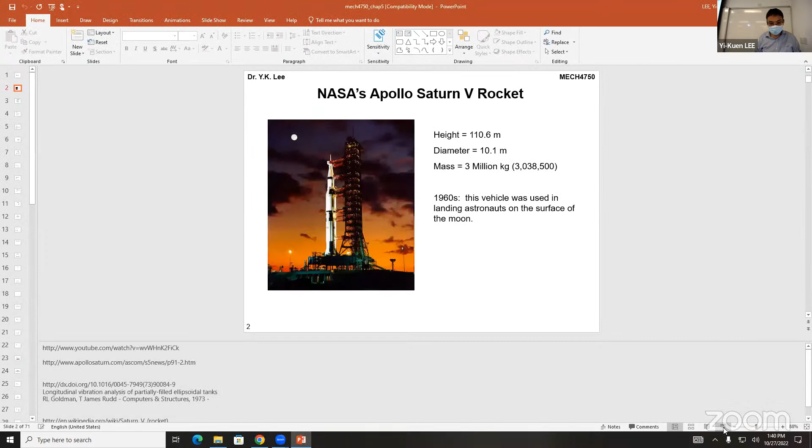Again, we have talked about this kind of two-degree freedom problem, right? The key question is I do hope that you understand, for different engineering, we may require different kind of model. I already showed you some example on this aerospace engineering.

Rocket problem, and then we showed you how we can use this kind of equation of motion, so that with two masses we can describe this with M and K. M is a 2 by 2 mass matrix, K is a 2 by 2 stiffness matrix, and we give you initial conditions, and then we can solve this differential equation either by hand if it's not too difficult.

If too big, what happens? We solve by computer, MATLAB, so something becomes a piece of cake. That's how, under harmonic vibration, we can reduce this differential equation into a linear algebraic equation. That is key. And then this linear algebraic equation becomes what? An eigenvalue problem, which you learned in linear algebra in our undergraduate math course.

The key thing here is, in this problem, what is known? U is a vector, the vibration amplitude vector, and these are unknown. What else is known? This is known. So given this mechanical system, our mass and spring or stiffness matrix, how can we determine this unknown?

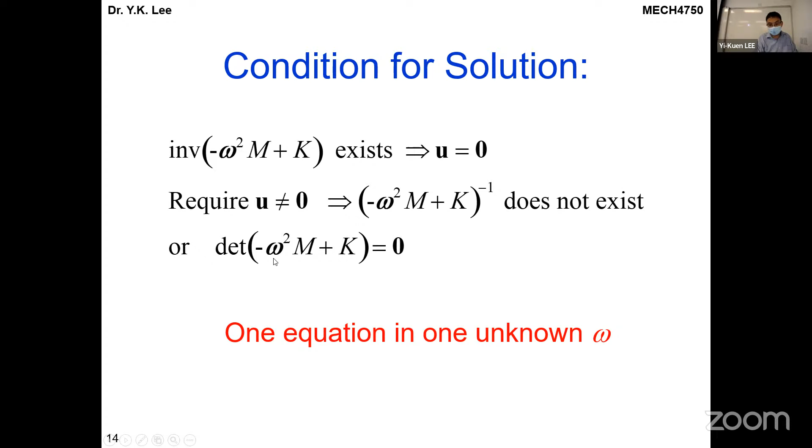So we basically try to solve this as an eigenvalue problem, and eventually for a 2 by 2 system, we can easily get the determinant of this matrix and solve for the unknown omega. This becomes a second order quadratic equation, and the unknown is omega squared, so eventually we can determine the natural frequency.

In general, there are 4 natural frequencies: plus, minus, and so on. So we get this result. And of course this is, basically, if it's a 2-degree-of-freedom system, with M1 and M2, then we have 2 natural frequencies. This is an important thing.

All of you should have no problem understanding this thing. But one student asked a good question: why do we have 2 solutions, totaling 4 solutions? So we have this one, and then -1. Most likely you can never find any mechanical system, M-C-K or M-K, that has a negative frequency, which doesn't exist in our real world.

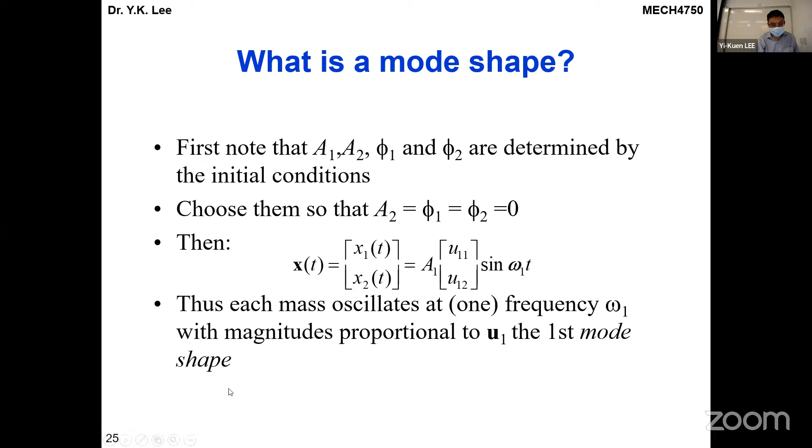We will then show you some examples about this problem. Of course, in MATLAB we can easily solve this problem, and then we will show you this in reality.

You can use MATLAB to do the simulation and also animation. That is something not challenging. I can provide you some MATLAB code. Do you know how you can use MATLAB to generate this animation?

Do you know how to use MATLAB to solve this kind of problem now? Do you have an idea? We already gave you some. Basically, MATLAB has certain kinds of functions.

You know MATLAB has an animate function. Once you can plot this kind of vibration amplitude as a function of time, animation, then you can use MATLAB to do this kind of animation.

Once you can plot this kind of thing, let me show you here.

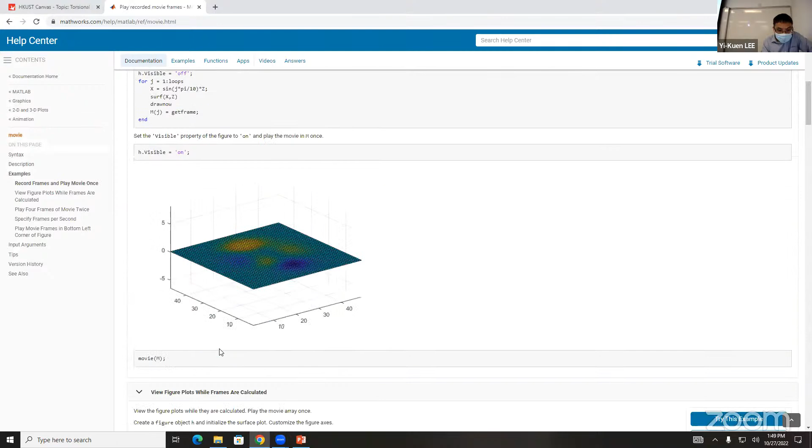MATLAB has this kind of function subroutine. So you use this one, and then you plot a series of these things, and you can generate the plot and do the animation. It's something not challenging with MATLAB. MATLAB has this kind of very good tools.

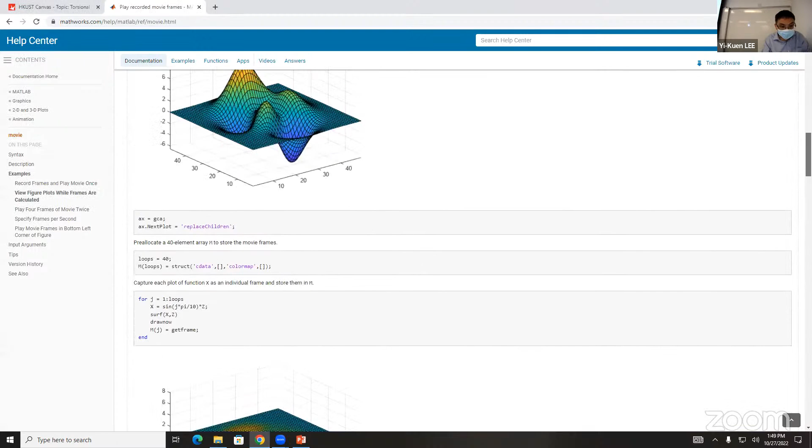Now let me quickly show you. Actually, this is one pretty good example.

Basically, movie. What's a movie? Basically, a series of pictures that play.

Maybe in 1 second, 30 frames, or 25 frames. That's what a movie is. Basically, you ask MATLAB to generate a series of pictures, images, and then play them. You see, movie(M), play the movie a number of times, and also specify the frame rate, FPS. MATLAB has this kind of function, and let me quickly show you.

It's a very piece of cake now. In old days, if you don't have a powerful computer, all this is difficult. But now your computer is so powerful, so it's a piece of cake. 20, 30, 40 years ago it was not easy, but now it's a piece of cake.

This is a membrane, a two-dimensional membrane structure.

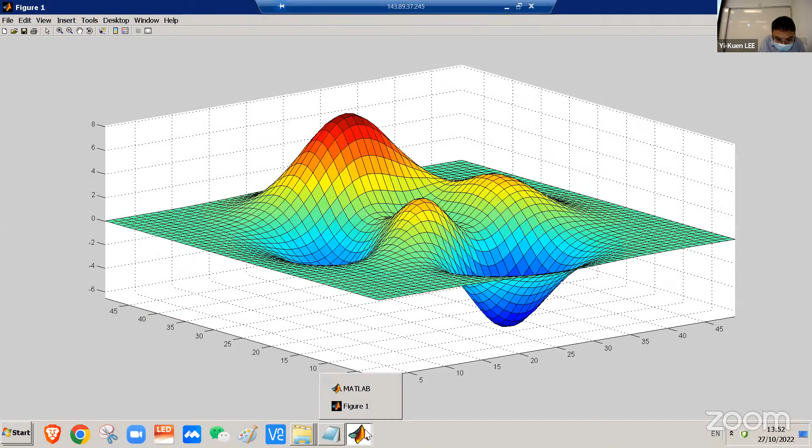I cannot copy, so I should use this kind of thing. I need to fix that, otherwise there's a little trouble to show.

The problem is I need to fix that X, Y, and Z, so there was none. Let me try this again, maybe shut it and then.

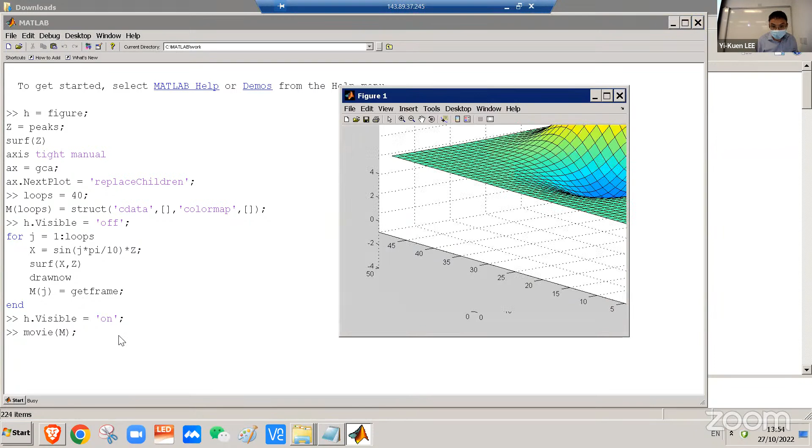Okay, can I make it a bit small? Anyway, let me try to play. Oh, it's shaking.

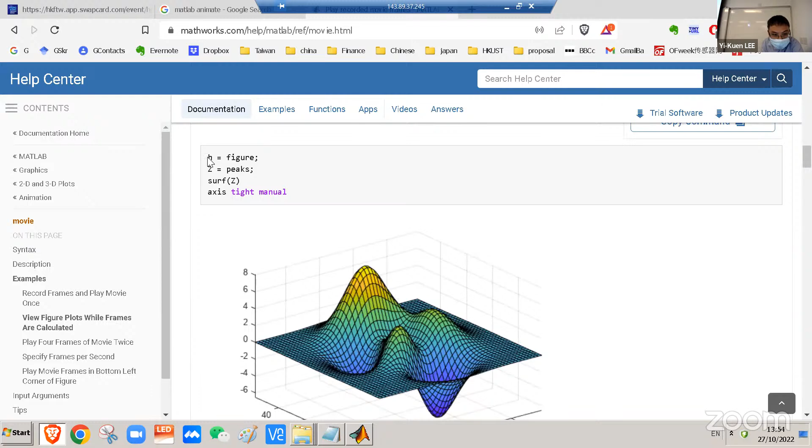I think this is the basic thing. I need to do some minor adjustment so it can show properly. We may need to do some adjustment to play this kind of video animation better.

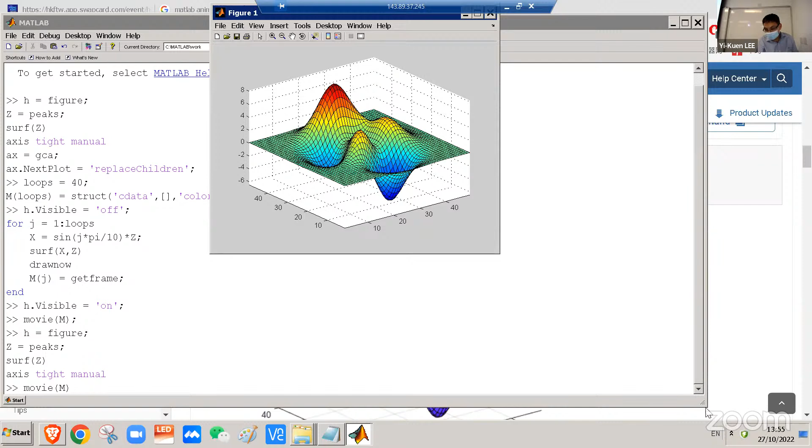Movie M again, hopefully it will be better. Sometimes you need to do some tuning about this parameter.

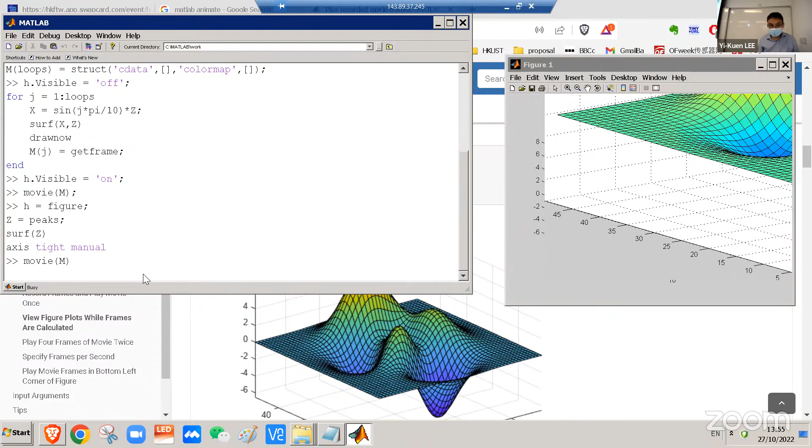There's certain things I need to do some adjustment for. I understand sometimes it happens. With the same thing you can try. I'm pretty sure there's a series of examples you can try to play.

For example, for a beam, at T1 you show this deformation, and at T2 you show another, so vibration X(T1), and then next you show the deformation X(T2). You basically use this to show at different times, and use this kind of movie function to show the vibration as a function of time.

This and then T3, right? This is a very basic way you can make this kind of animation and movie. Of course, MATLAB can also generate the MPEG output file, not only show it in MATLAB.

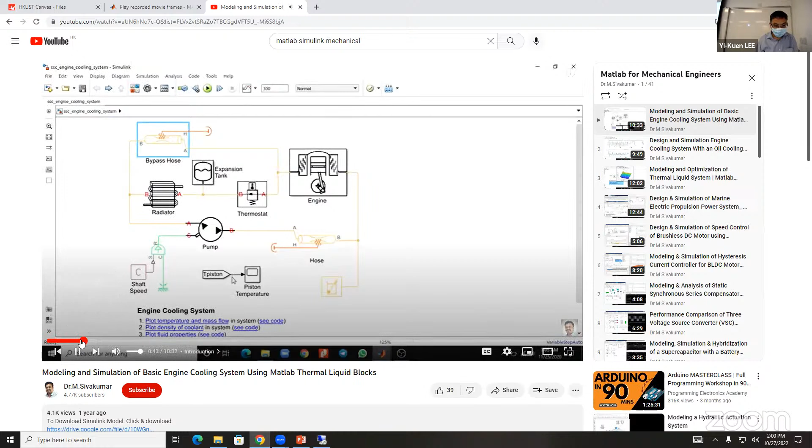You can create very complicated mechanical systems in Simulink now and do the simulation. So MATLAB has a lot more this kind of function. It's more than what we use here, but at least it gives you some idea. And of course, this is the exact solution we have solved. On the other hand, without this exact solution, how can we do it in MATLAB?

This is the exact solution. You could solve the ODE by hand, but in MATLAB we can solve this by numerical method. So how can we solve to get this result in MATLAB? We mentioned in a previous lecture how we can solve this using the ODE solver. In MATLAB, this is basically an analytical solution for a 2-degree of freedom system, but we can use another numerical solution.

So we have a numerical solution in MATLAB, basically using this kind of ODE solver - for example, like ODE45 solver or something. There's a series of solvers. You can easily solve this without using the analytical approach, so again this is not difficult, but it's useful for you to look at this kind of thing.

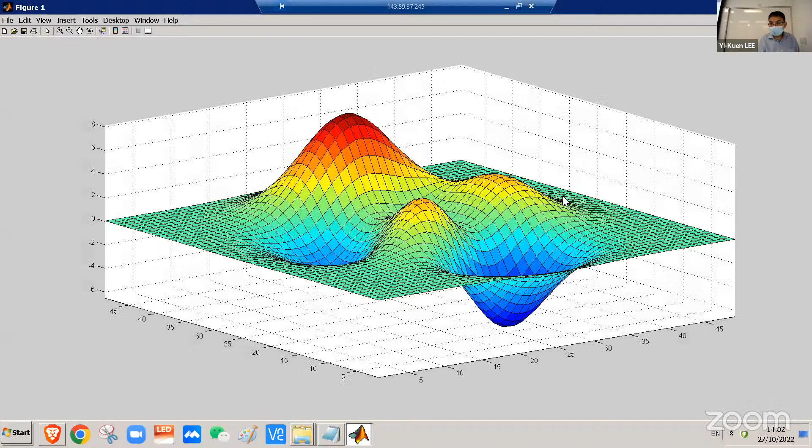We do have ODE solvers, a series of them. Once you specify the MCK mass-spring system, you use this kind of ODE solver to solve for vibration as a function of time. This ODE solver solves the differential equation - it describes our MCK in this kind of ODE function, and then T span specifies, say, from 0 to maybe 10 seconds, along with initial conditions, so you can easily solve this thing.

Oh, this is one example: Van der Pol, nonlinear. This Van der Pol is one of the very classical problems. Van der Pol is a nonlinear electrical circuit model. We just use this one thing, ODE23, to solve this Van der Pol.

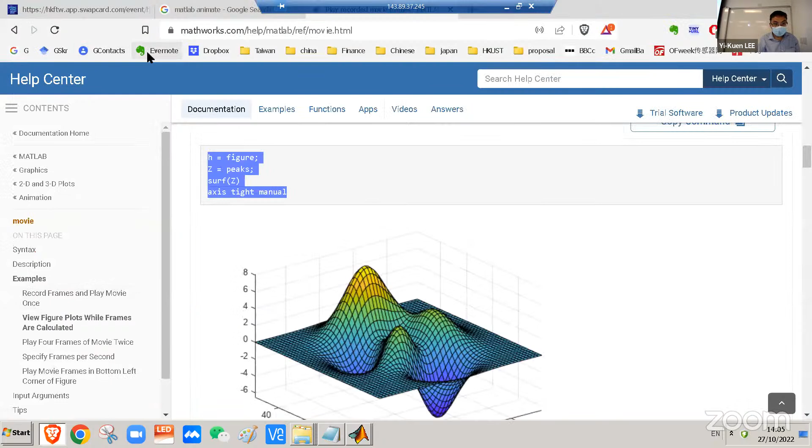VDP1 - evaluate the Van der Pol ODE. Did you know what Van der Pol was? It's a nonlinear electronic circuit. It's one of the very... oscillator.

It can be, this is here - electronic is nonlinear, and so MATLAB has a built-in function to describe this nonlinear ODE. You see, just like MCK, mass... MCK, right? But this velocity term is nonlinear. Do you understand? It's nonlinear, and then cosine. Oh sorry, I should try to share with you.

So this Van der Pol is a nonlinear system. You can look at this M, but this C is nonlinear, and K, right? And depending on this parameter mu, this nonlinear damping can have very different kinds of response. Okay, so I told you this is quite sophisticated.

So basically, we can reduce this kind of second order ODE into a first order ODE, and write it down in MATLAB. VDP1 is now a built-in function, and then you can solve this thing.

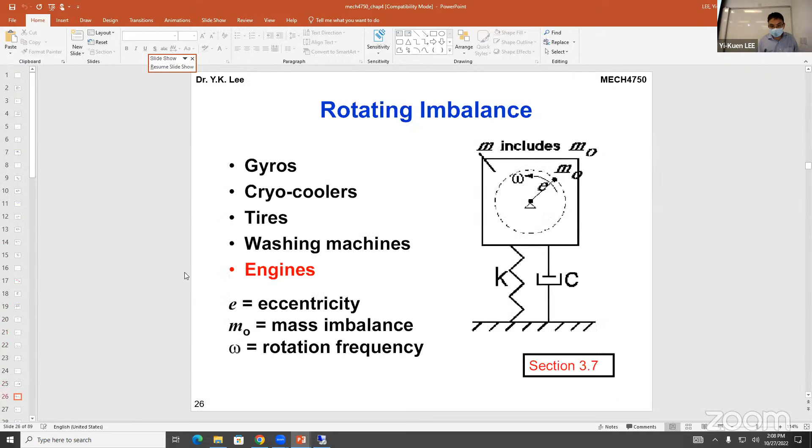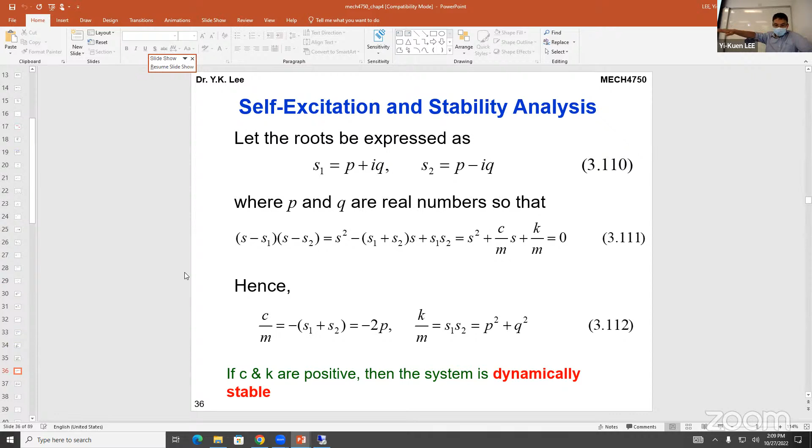For the nonlinear vibration system, we have this kind of issue, right? I think I'll show you this phenomenon - this one, stick-slip excitation, right? If you have some friction, you have a mass spring system with friction, and then you will see this thing. This gives you potentially negative damping.

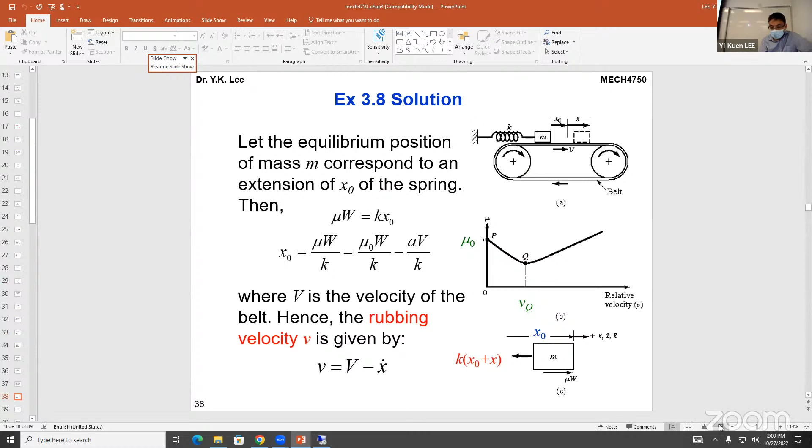So you will show some similar behavior, like I'll look at that Van der Pol. You see, negative - this is something that gives you some idea of the thing. Do you have any questions about this? At least I told you this part - once nonlinear, it's somehow complicated. I'd say complicated behavior, but it's important to understand how we can really grasp this kind of nonlinear behavior. Why? Because many times we do solve real problems.

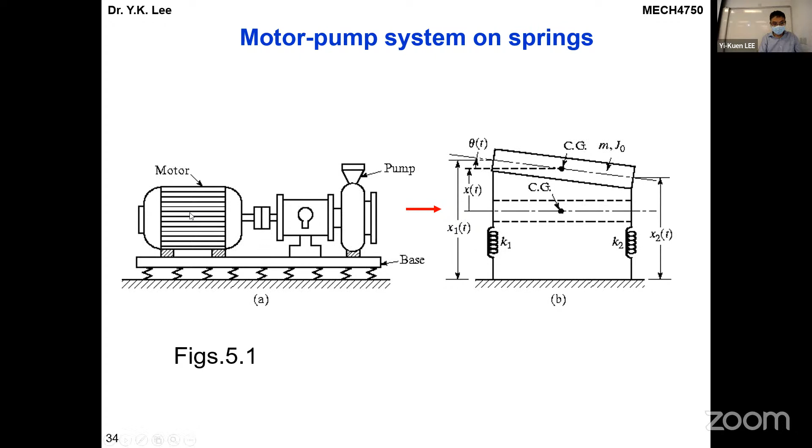I can show you - let me see if I can show you now about this real... can I show? Okay, anyway, so I just tell you that this is something quite sophisticated, I would say. Let me see, I can show you this one through this... check.

I got a big package from Guangzhou, and inside they have this thing, let me see if I can show you. Uh-oh, I cannot. I don't know how to share with you. Oh, okay, you're right. Let me see. I think I can share. Let me see how. Join. You don't need to use... The screen has a function to project your AirPlay. Oh really? In share screen. No, press on share screen, then AirPlay, I can click this. It should have the mirroring function of your iPhone. Let's see, this one, then find the zoom. Oh wow, this is new, I don't know this new function. Oh yeah, interesting, it's interesting too. I just sent you this, but anyway, I'll show you here.

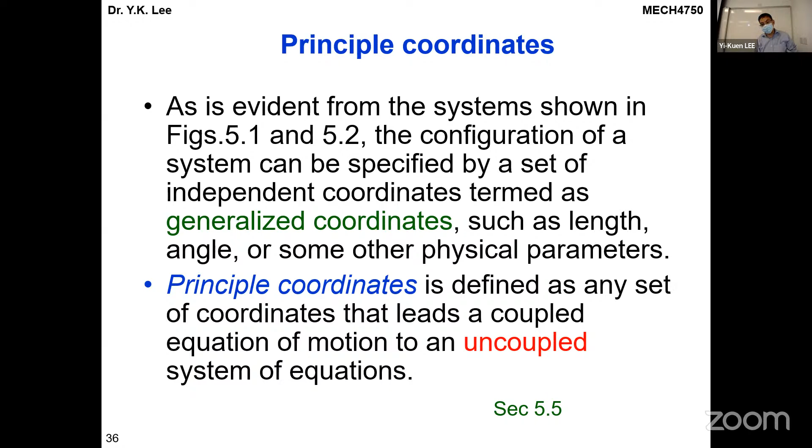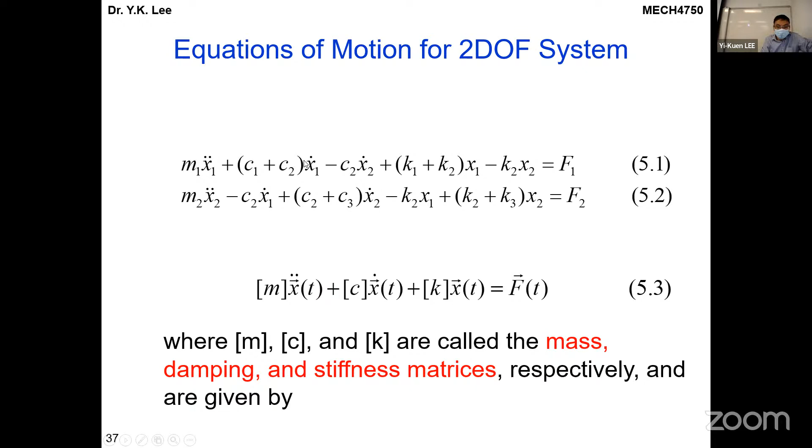Yeah, and of course another thing is, once you have two degree of freedom, or a multi-degree of freedom problem, next we need to find some new coordinate system or generalized coordinate system, so we can decouple this kind of MCK differential equation system, right? So that it's uncoupled, decoupled. For example, if we have a 2DOF model MCK with damping, in this case, how can you solve this problem?

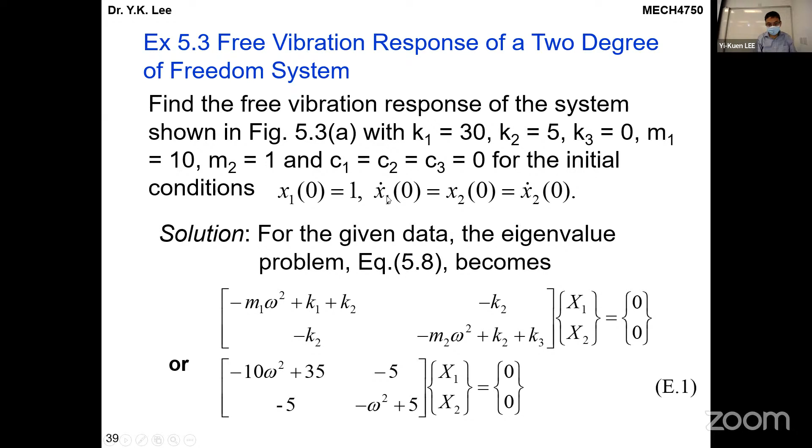Basically, of course, you try to describe this kind of MCK, where M and K are symmetric, and in general it takes time to solve this kind of thing. But for example, let's use this as an example: given M1 is 10 kg, M2, K1, K2, K3, the initial condition where M1 initially has 1 displacement, and all these things, right?

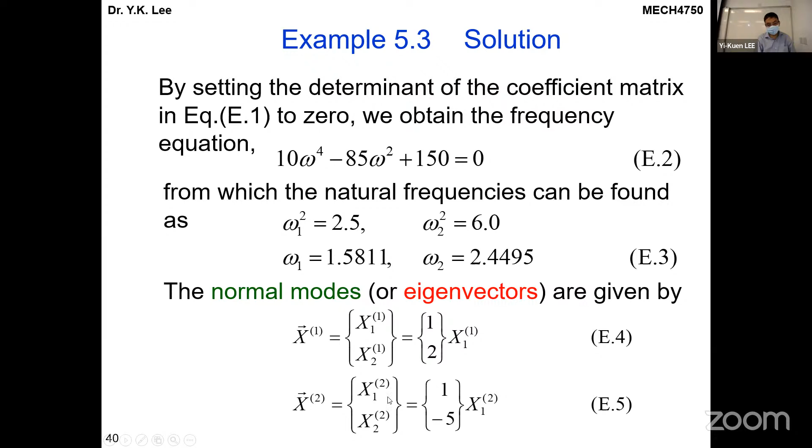So then we can solve this thing. For a 2DOF, actually we have an exact solution. We can solve this kind of quadratic equation to get the solution: omega-1, omega-2, natural frequencies, and vibration modes. And then we can solve this one. So this is, I think, a quite simple approach.

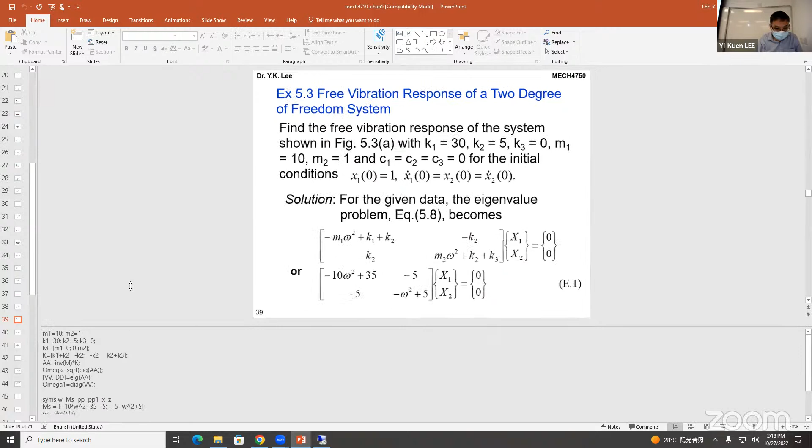Of course, in MATLAB, how can we do that? Let me show you. In MATLAB, basically we can do this kind of thing: we set M1, M2, K1, K2, and define... let me quickly show you. Basically, we define our M1, M2, mass matrix, and stiffness matrix, right? And then what do we do? We use EIG. EIG is the one we use to solve the eigenvalue problem and produce our output eigenvalue and eigenvector.

If you enter the EIG matrix, it gives you V and D. Why? V and D is what we want to see, you see?

So of course you have a tool, so they can solve this kind of eigenvalue problem. For this particular example, basically we can do it. We can inverse of m, and basically you can do things.

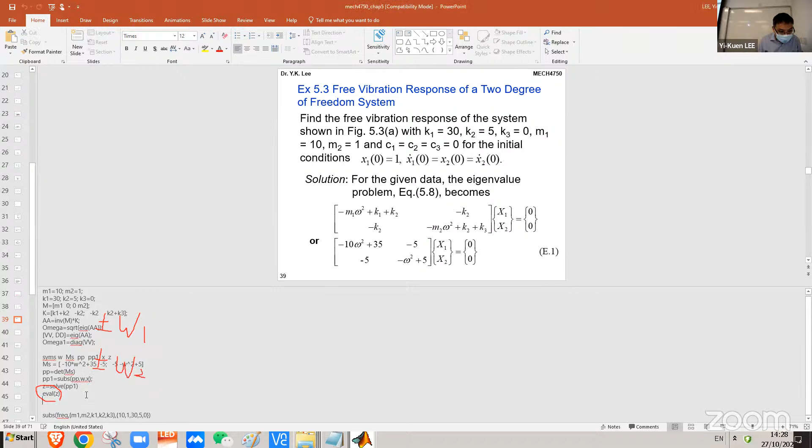Now we describe this in our lecture notes, right? But it was a different MATLAB approach. Of course, EVAL is what? It is, because we have become some symbol, right? So if you want to calculate this thing, we convert this kind of thing into a floating point number using EVAL.

Any question, Thomas? MATLAB, how? Yeah.

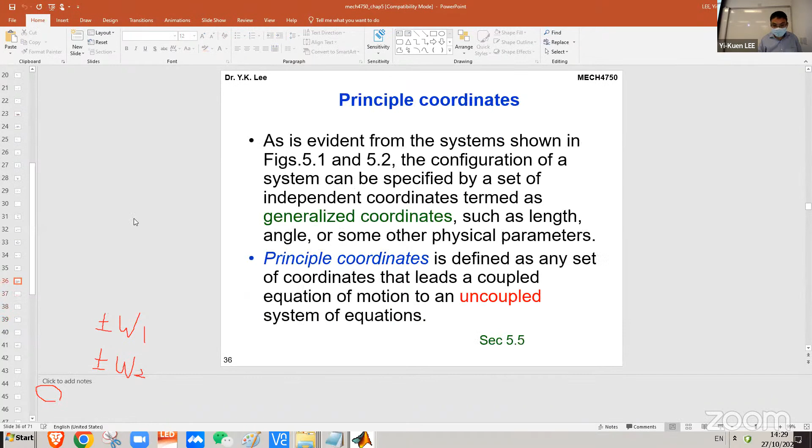Again, this is a MATLAB approach to describe what we described in the previous chapter in a different way. Remember, once you have an MCK model, I showed you we can solve this kind of equation of motion analytically. So this is just an example in this MATLAB approach.

And then, in our MATLAB, we already showed you this V, remember VD. The V basically has two components. The first component is V1, and V2 is this component right here. And D has two components, omega 1 and omega 2, the two natural frequencies.

So it equals this kind of eigenvalue, EIG, and then this kind of inversion, INV, multiplied by K. So this is a MATLAB approach to solve this problem.

Of course, with the same approach, MATLAB is powerful. It's not limited to a 2DOF. If this is 100 by 100, or 1,000, your computer now is pretty high speed with enough memory, so you can easily solve very big problems, which was difficult to do 20 or 30 years ago.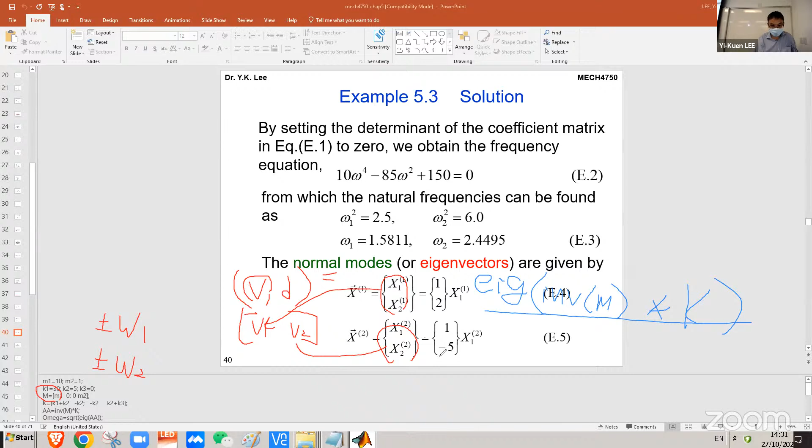But that's why you can easily solve this. I can show you now - for example, if you want to solve a very big problem, it's a piece of cake. Typically, what's the memory of a typical PC now? You can estimate how big the M and K you can handle, based on the memory of a typical computer.

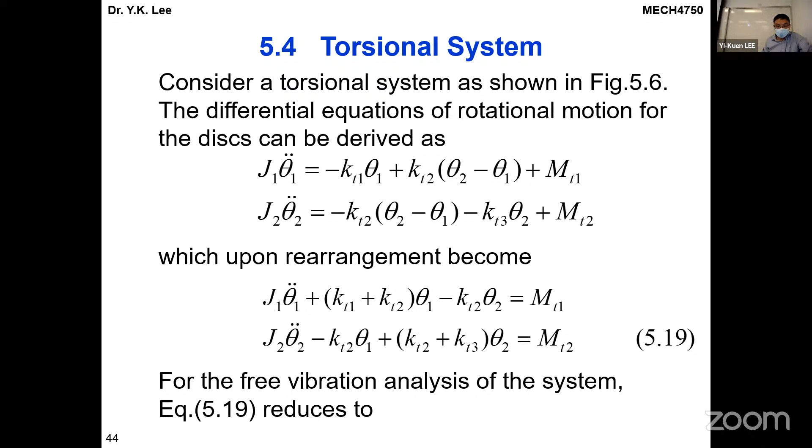Once you have a motor, then we have certain kind of gear or inertia. We can try to construct either one-DOF, two-DOF, or n-DOF system to solve this kind of vibration problem.

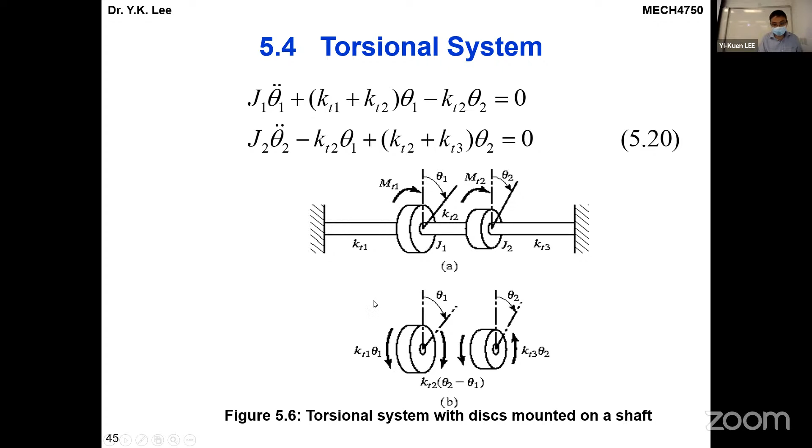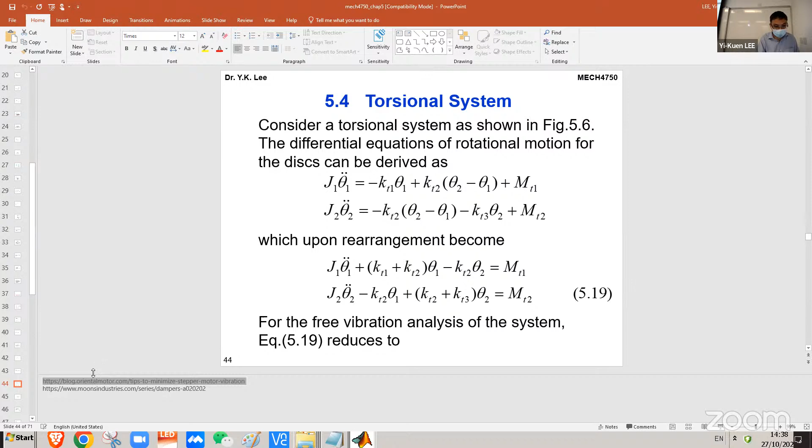I can show you. We do have some practical problems in the real world. So in the real world, how can we solve this kind of vibration problem? What do you think?

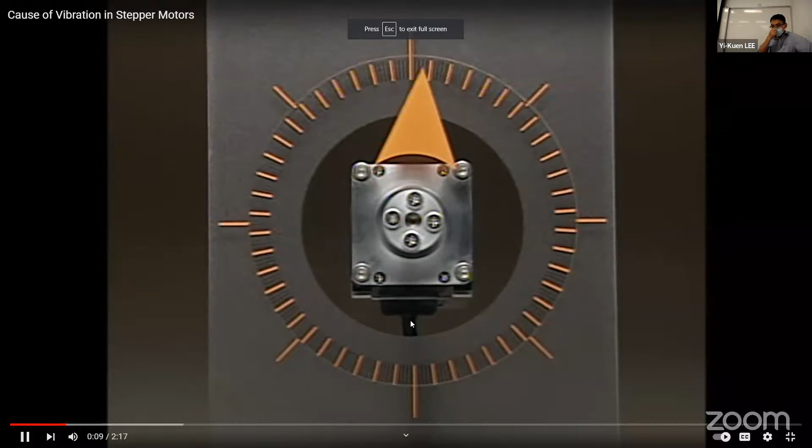The stepping motor has a 0.72 degree step angle to rotate with one pulse. You have an inertial rotary mass spring system. Because of this, when operated at low speed, it repeats moving and stopping. This sometimes causes vibration.

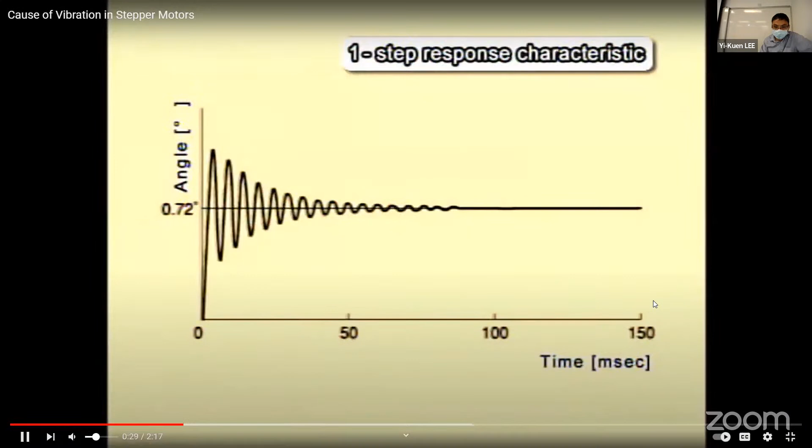One of the major causes of the vibration is the one-step response characteristic. In this graph, the horizontal axis represents time, and the vertical axis represents angle. This shows how the stepping motor makes a one-step rotation. It does not completely stop after rotating 0.72 degrees with one-step movement. It repeats damping by going forward a little past 0.72 degrees, then coming backward a little, and coming back a little further before a complete stop.

The portion going forward past 0.72 degrees is called overshooting, and the one coming backward past it is called undershooting. These overshootings and undershootings are the causes of the vibrations in the stepping motor.

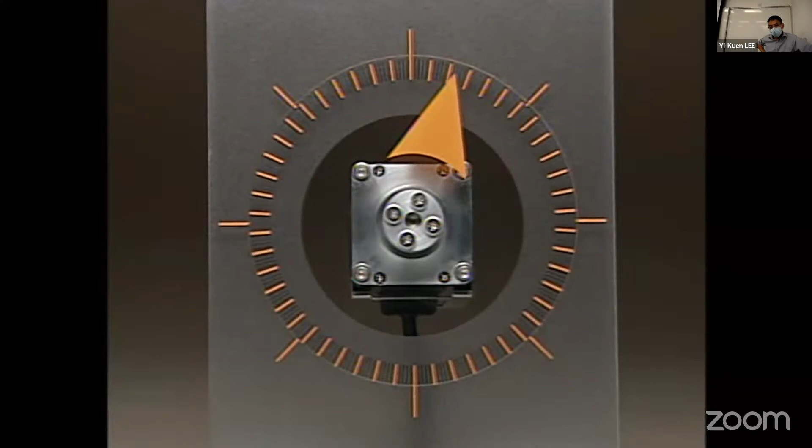The frequency at this time is called the resonant frequency. When operated at a much higher speed, the motor proceeds to the next movement before the overshooting and undershooting occur, so the vibrations are reduced and the operation becomes smoother.

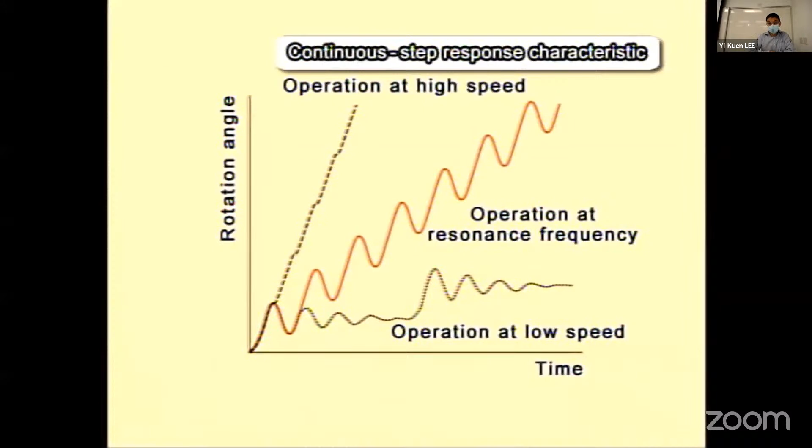So this vibration problem is very common. Even in 3D printers, you have vibration, right? I do have a project that suffers vibration for the main LiDAR. You have a motor, so vibration is a very serious problem for many projects.

I have multiple projects. Most of them have vibration problems. This is something interesting, huh? Okay, so of course the key question now is how can we solve the vibration problem? What do you think?

This PID is active vibration control. Before PID, you should think about adding additional C, a viscous damper or visco-elastic damper with some spring. This is the way we add additional damper to absorb the energy. Remember, we have told you this is a practical way now to solve the vibration problem.